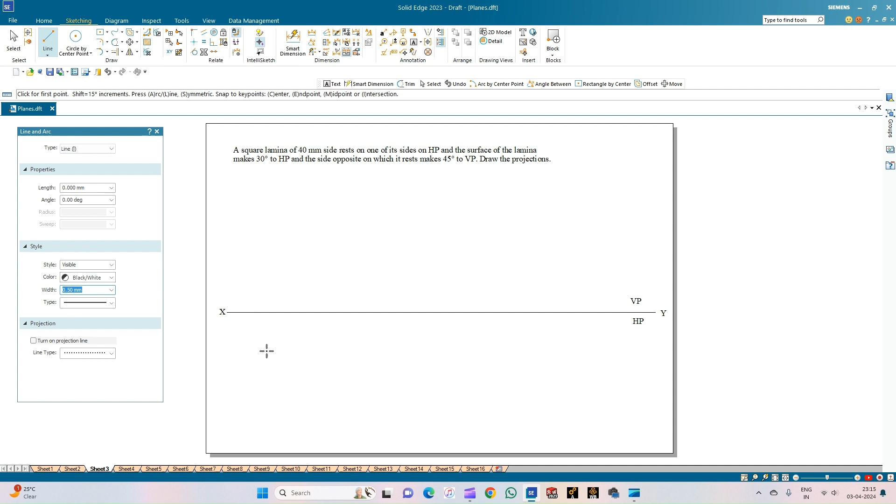So now we will execute the top view of the square lamina, which is measuring 40. Since it is a square lamina, all the sides must be equal and it is resting on one of its edges. So now we will annotate this square lamina as ABCD. This is corner A, this is corner B, this is corner C, and this is corner D. So this is the top view of the square lamina resting on one of its edges AB.

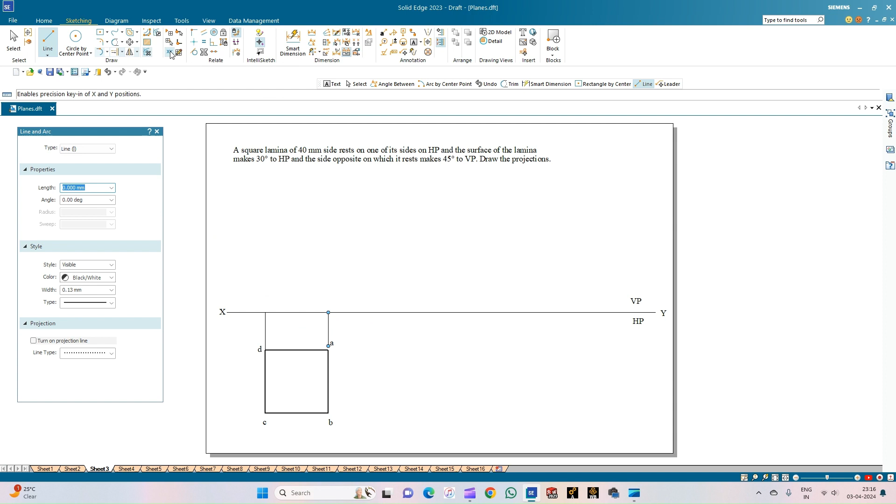The edge AB is considered as the reference edge towards the right hand side of the observer, and this is the resting condition. So now we will mark the front view of this square lamina. For that we will select a projection line of thickness 0.13 and try to intersect the XY line. And now we will trim this portion of the XY line and draw the front view of the square lamina, which is a straight line.

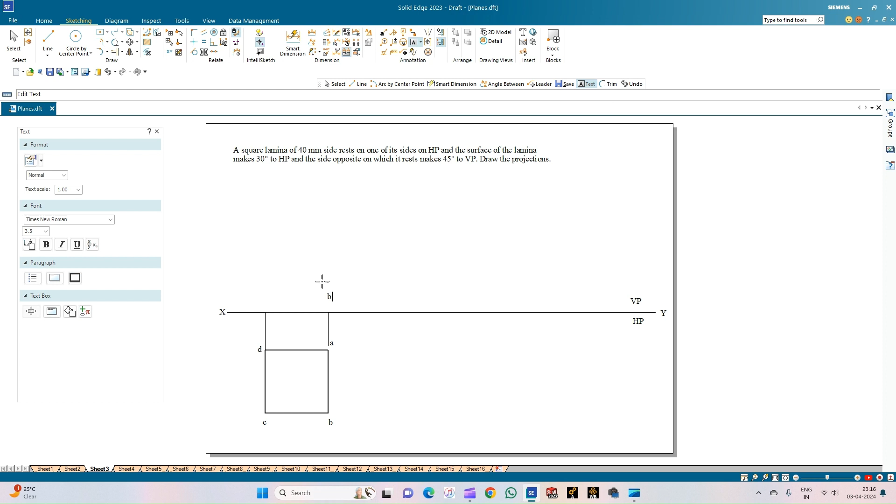So we will join the distance between the end projectors and we will annotate the front view of the square lamina as B dash and A dash, and this is C dash and D dash. The corner C is visible to the observer and D is not visible, and here the corner A is not visible, and the corner B is visible. So that is the reason.

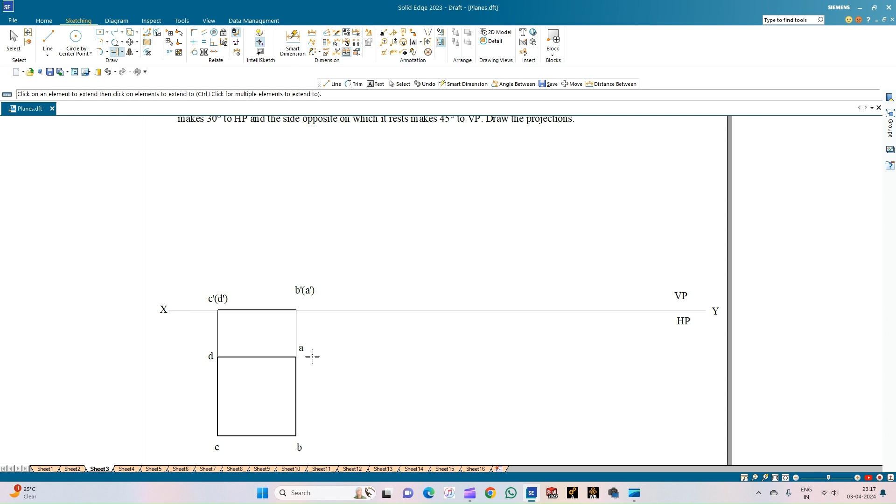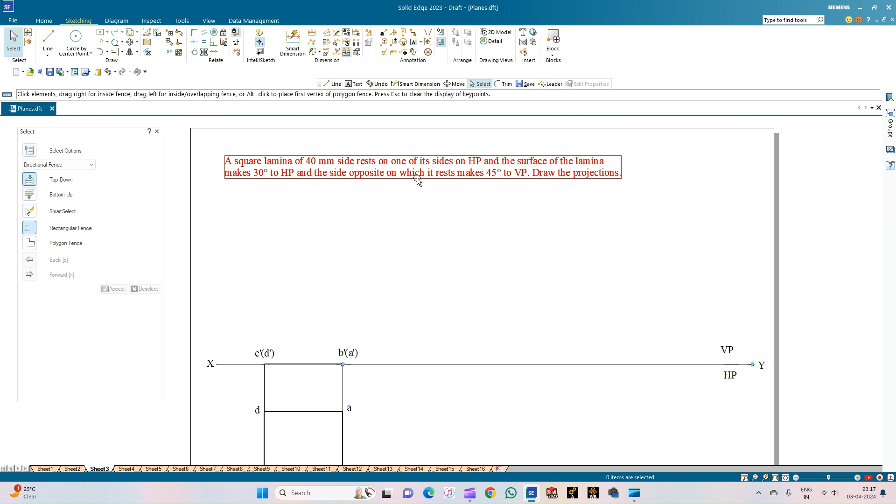Okay, so now this completes the initial position. This is the top view of the square lamina resting on one of its edges AB, and this is the corresponding front view of that particular square lamina. So now we will go for the second position, that is the inclination of this lamina with respect to the horizontal plane. As per the problem statement, it is inclined to HP at an angle of 30 degrees. So now we will consider this statement.

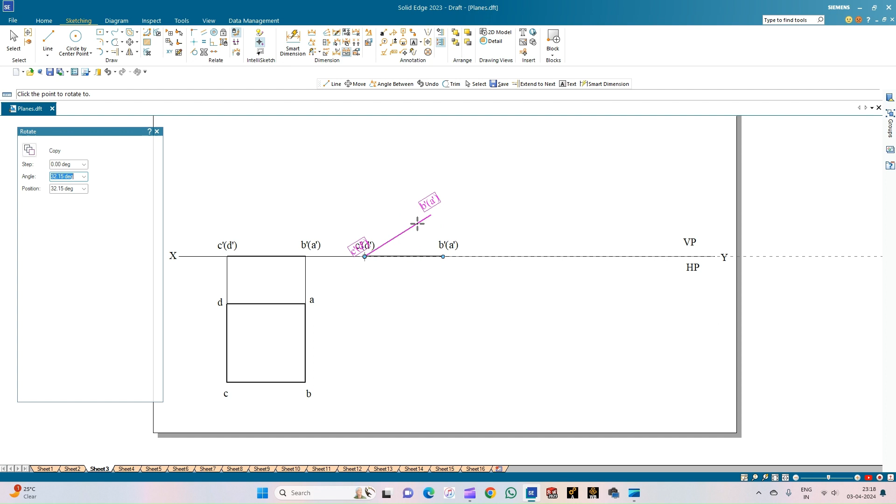So we will select the front view of the square lamina and then we will try to move this. Whenever we are moving initially, ensure the copy button is on. So now move the front view of the lamina on the other side of the XY line. And now we will rotate this. Select the rotate option. The first point of rotation is the corner B, and the second point of rotation is the corner C.

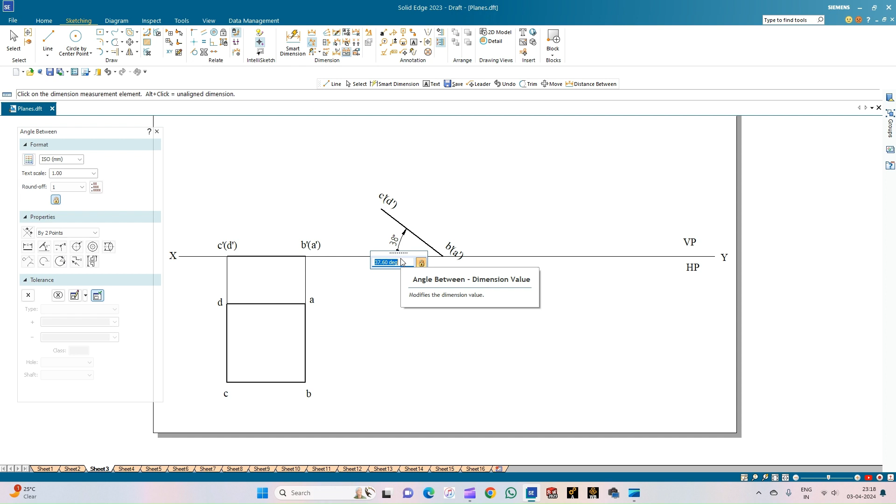So we have rotated this at an arbitrary angle, so we can just measure this angle and change it to be the required angle of 30 degrees. You can see that when we do this, the line is not intersecting with the XY line. So what we can do is, whenever we are using the rotate option, there itself we will give the rotation angle as the desired angle.

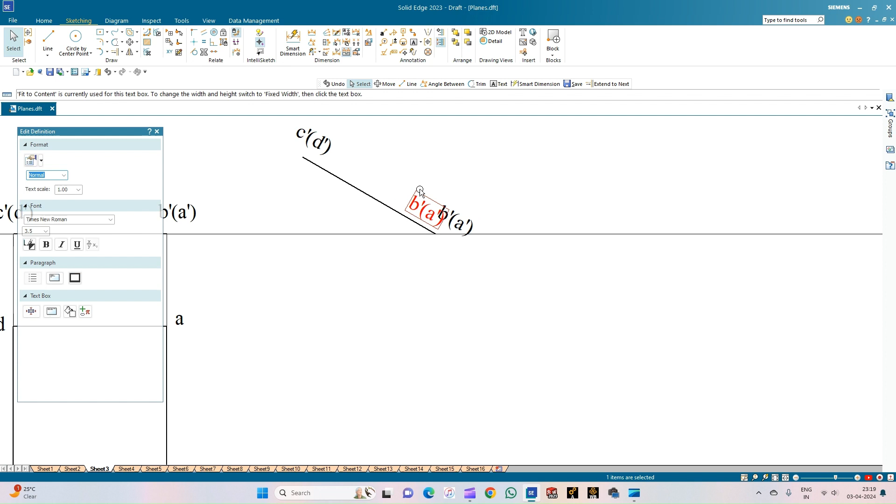So we will select the rotate option. This is the first point of rotation and this is the second point of rotation. The angle is 30 degrees. So this is the direction. Now you can measure the angle, which is 30 degrees. So now we will draw the vertical projector downwards. Select the line option and draw the projection line of thickness 0.13 mm.

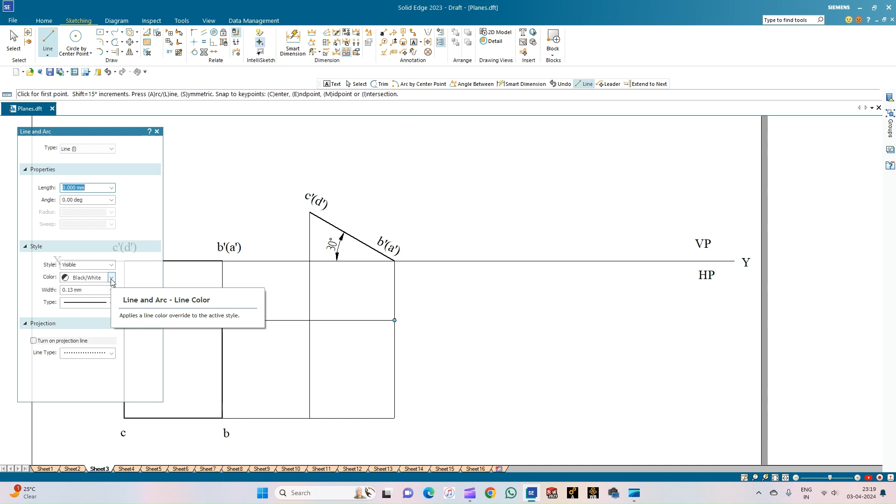So ensure all the projection lines will be measuring 90 degrees, minus 90 degrees and 180 degrees whenever you're doing it from the left hand side to the right hand side. So these are the points of intersection and then this has to be darkened. So this is the thickness of 0.50 line shall be chosen and from the point of intersection we will mark the corresponding edges of

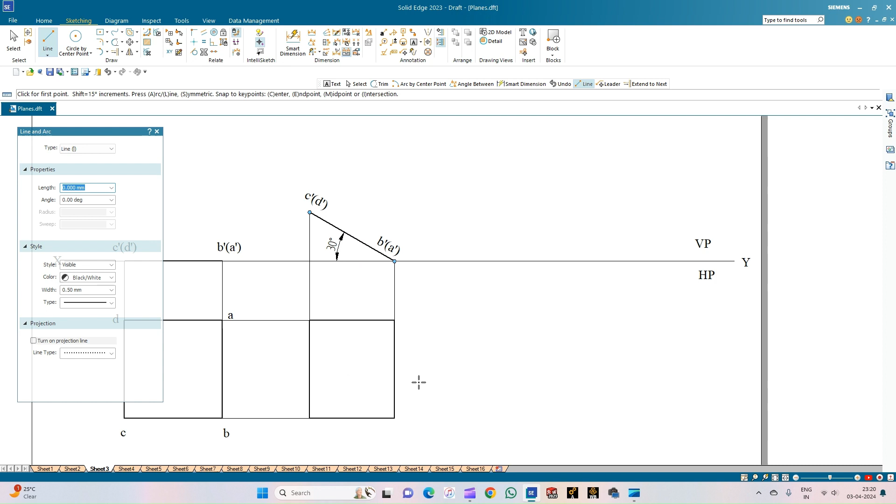the square lamina. So you can just see that whenever the square lamina is inclined at an angle of 30 degrees, this is the top view of the square. You can just show the measurement here. So this is 40 mm and this is also 40 mm. But here you can just see that it has been diminished because this is the top view of the lamina when it is inclined at an angle of 30 degrees to the HP.

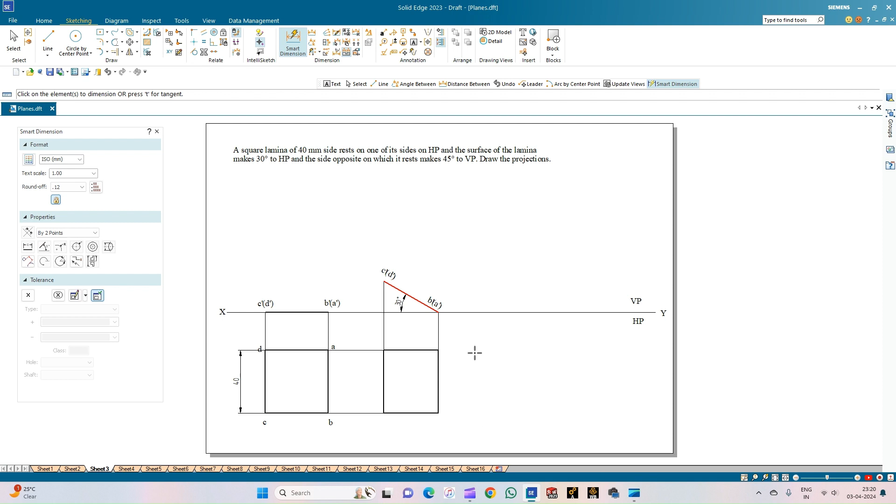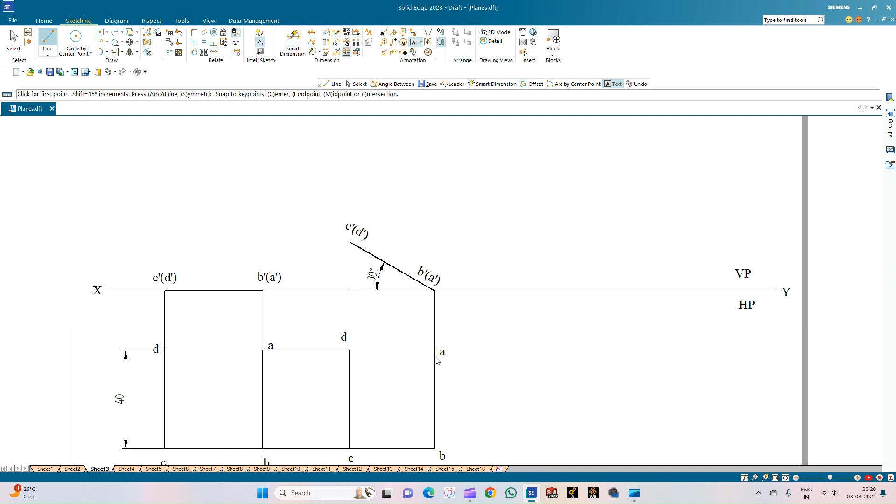So now we will annotate this. So this is corner A, this is corner B, and this is corner C, and this is corner D. So now we need to consider this diminished square lamina for the next position. So the next position is the side opposite to the edge on which it is resting. So that is AB is the resting edge and the edge opposite to this edge is DC. So the edge DC is inclined to VP at an angle of 45 degrees.

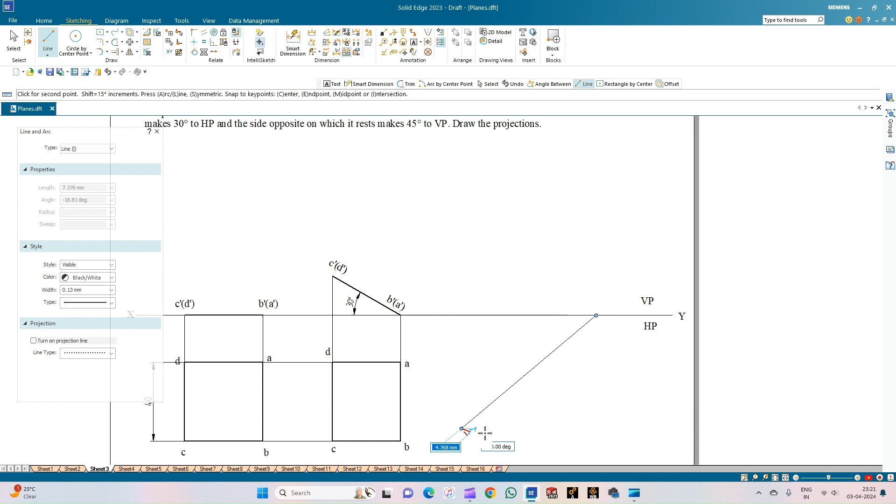So now let me draw a line of inclination of 45 degrees with respect to the VP. So let me draw a line of any arbitrary length and the angle will be 45 degrees. So measure the angle. It is 45 degrees with respect to the vertical plane. So now on this line, I need to place this square lamina ABCD such that it is the edge CD which is inclined to the VP at an angle of 45 degrees.

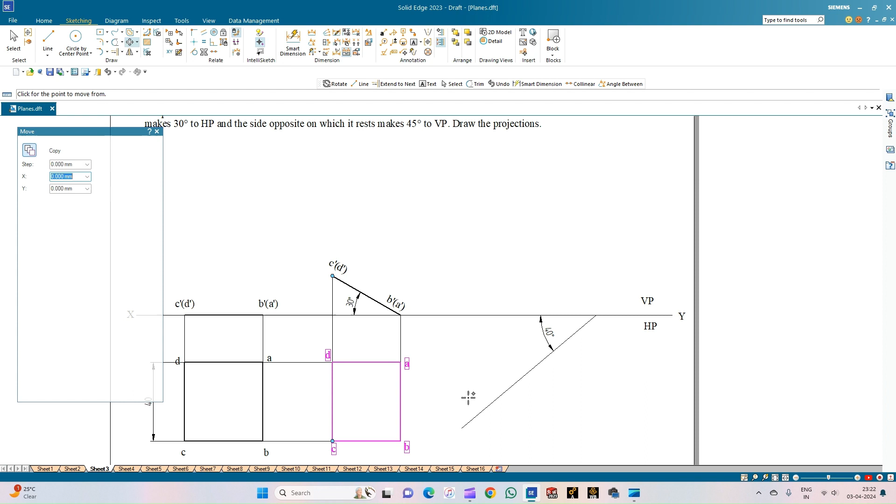So for that, let me go for selecting the square lamina along with the annotations and then select the move option, ensure the copy is on. So now keeping point D as the reference, let me move the point D on this XY line. And now selecting the rotate option, ensuring the copy is off. First point of rotation, second point of rotation, and rotate the edge CD on the XY line like this. So now this completes the inclination of the square lamina towards the VP on the edge which is opposite to the edge on which it is resting.

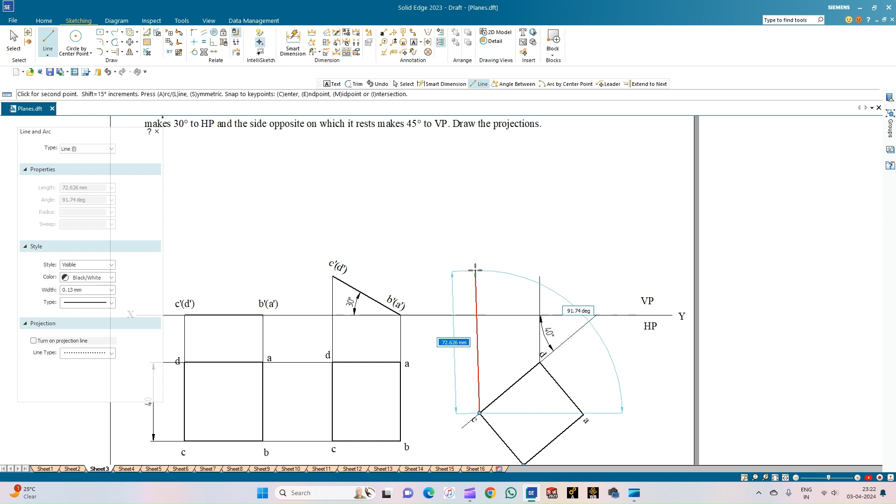So now we will draw the vertical projectors from the corner D and similarly the vertical projector from the corner C. The vertical projectors from corner A shall intersect the XY line and similarly from that of the corner B shall intersect the XY line like this. So now select the line option and then select a 0.50 mm thickness line and then join this.

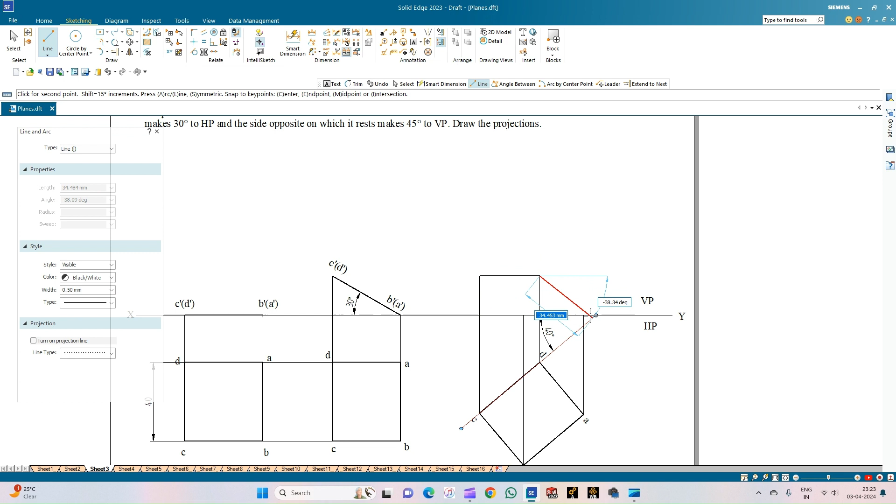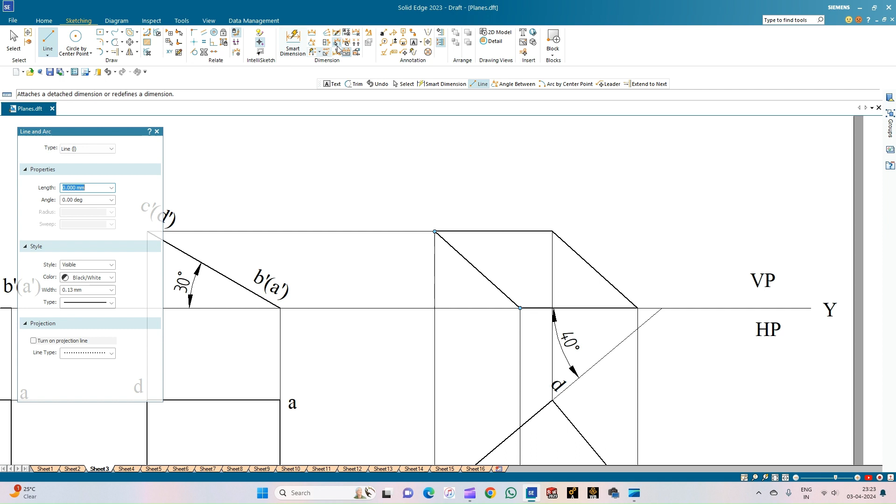So I've just taken the reference from the tilted line in the front view. So I've not shown the projection lines. However, we can just show that. So select 0.13 mm. So you can just see that it is intersecting here. So this is the view of the square lamina whenever it is inclined to the VP at an angle of 40 degrees. So now we will annotate this square lamina. So this is D dash and this is the corner C dash and this is corner A dash and this is the corner B dash.

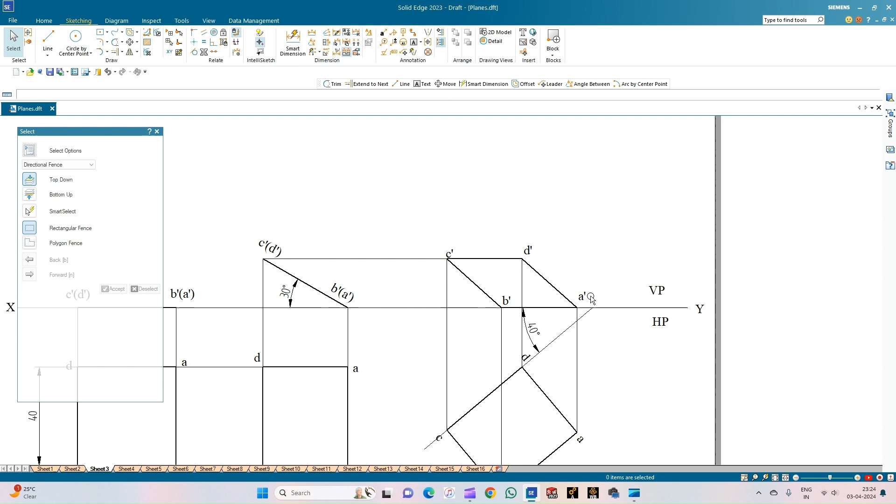So how do we check the correctness of the problem? So you can just see that in the initial position it is resting on the edge AB and here also it is resting on the initial position that is A dash B dash. So this is how we can validate the correctness of the problem. So now we'll indicate the direction of the projection lines. So for that, select the leader option and select properties and change the color to black. Click OK and show the direction of the projection lines for all the projector lines that we have drawn.

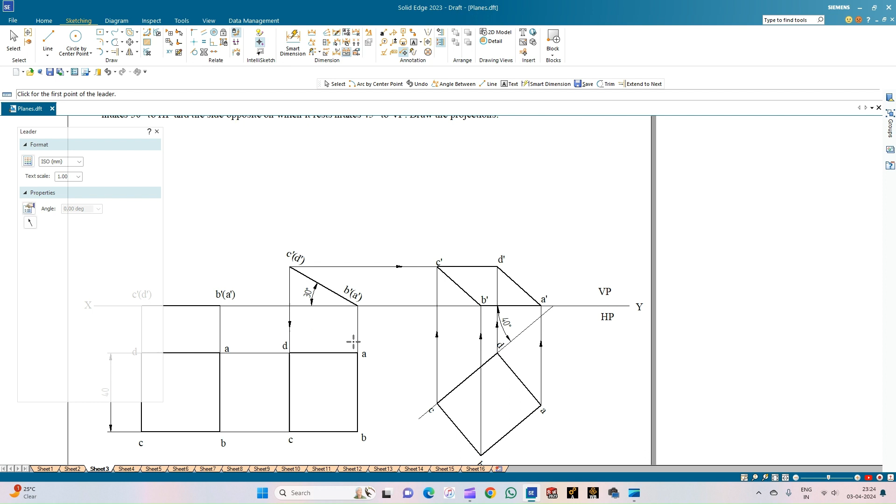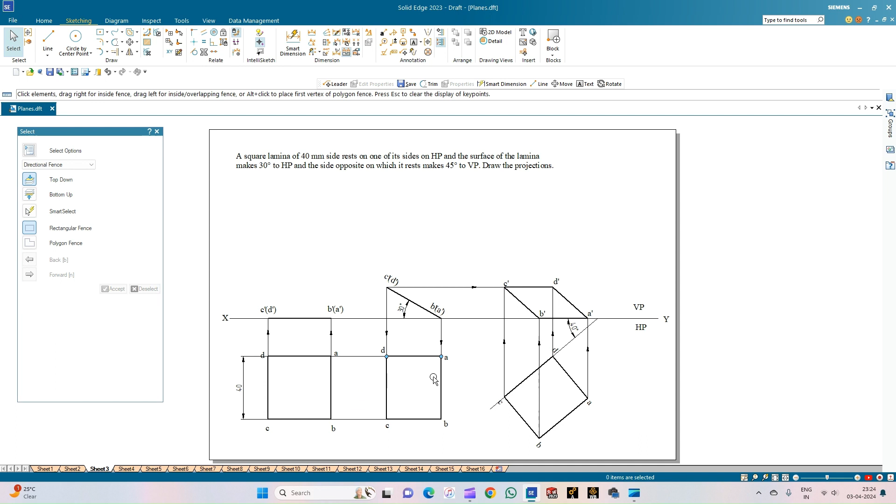So with this, we complete the solution for the problem statement, which states that a square lamina is resting on one of its edges and it is inclined to the HP at an angle of 30 degrees, and the edge opposite to the edge on which it is resting is inclined to VP at an angle of 40 degrees. So with this, we complete the problem.